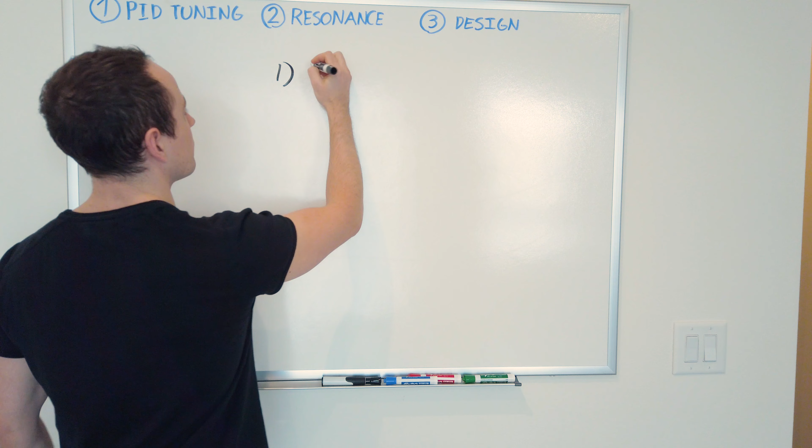First is hover at low PIDs. Now, in general, what I do is I use the sliders. Follow UAV Tech's slider tuning video—he PID tunes his drone in like 2 packs. That's the same process that I use.

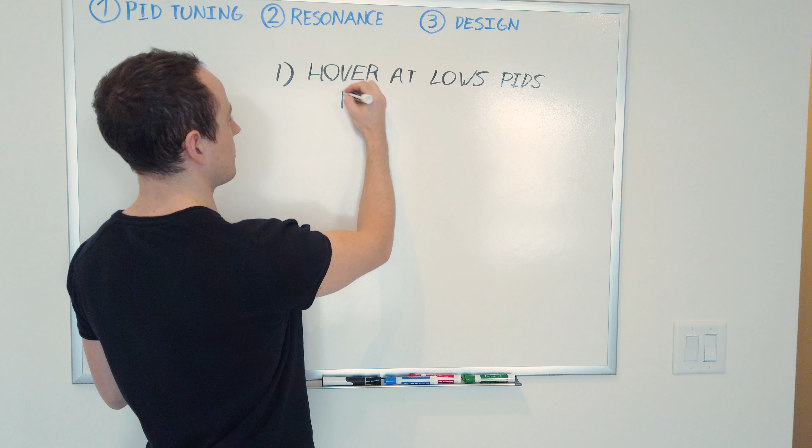But with a Cinelifter, you want to be careful. Set your P to D ratio to, I don't know, 1.8 is a good number, where you have a higher D term than you would normally to compensate for the extra momentum of the camera payload.

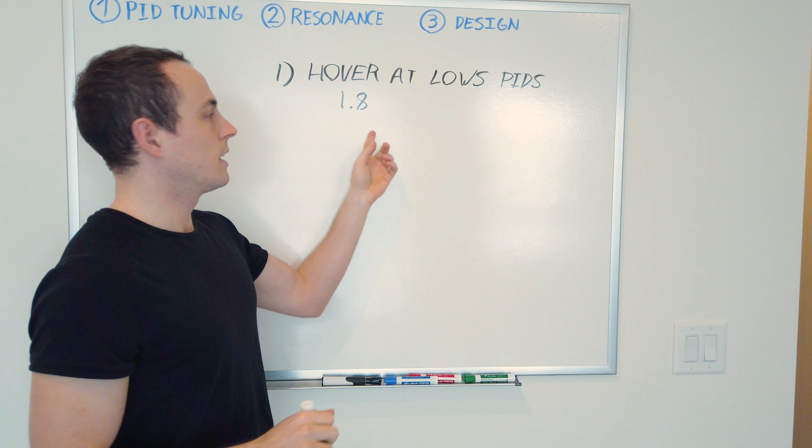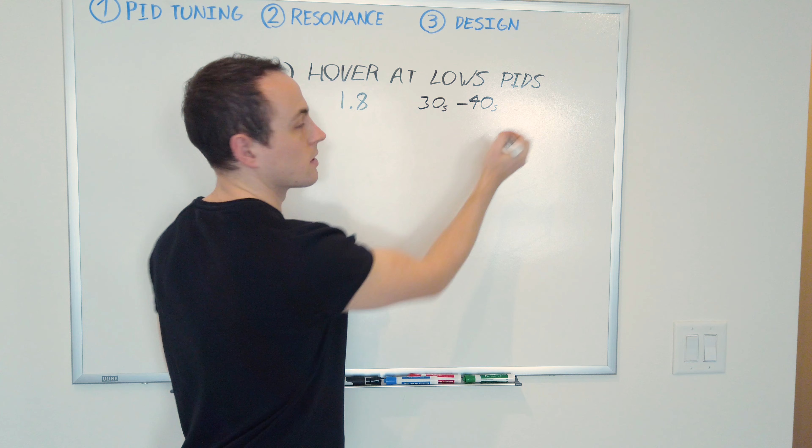Once you have that, turn down your PD gains such that they're in the 30s to 40s. This will first make sure your drone's propellers are turning in the right direction and all that stuff, so nothing crazy happens. But when your drone is lower in PIDs like this, if something crazy happens, like a flyaway, it's not going to have enough power or reactivity to actually take flight and shoot up into the air.

So that's a safety thing. The second reason why you want to start off your drone with the Ps around 30 or 40 is checking resonance. You should really learn how to use blackbox, and there's plenty of videos on how to do that. The power of blackbox is you can go in there and see things you can't normally sense. If you get really good, you can hear resonance and oscillation.

It will just sound more rough around the edges, but you won't be able to really quantify that. So after doing a hover test—first step, hover test at low PIDs—check the blackbox, search for any resonance spikes. Resonance spikes usually happen either in the frame itself or with the camera payload mounting system.

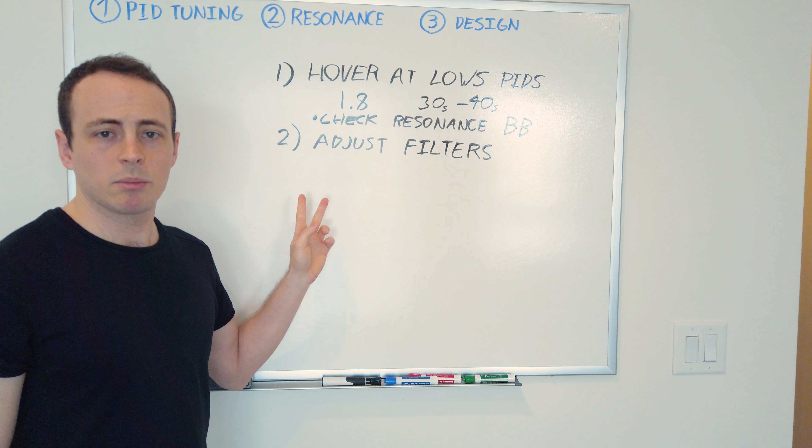Okay, second step is to adjust any filters you have. The way UAV Tech does his filters, I'm a fan of. What you do is you turn off the gyro low pass filters, and then you're utilizing the dynamic notch filter and the RPM filter to do all the filtering for your drone. What that does is reduce phase delay, and you want to reduce phase delay as much as possible. We'll talk about that more in the next chapter. But the important thing here is if you have resonance because of your camera or your frame, you want to apply a notch filter.

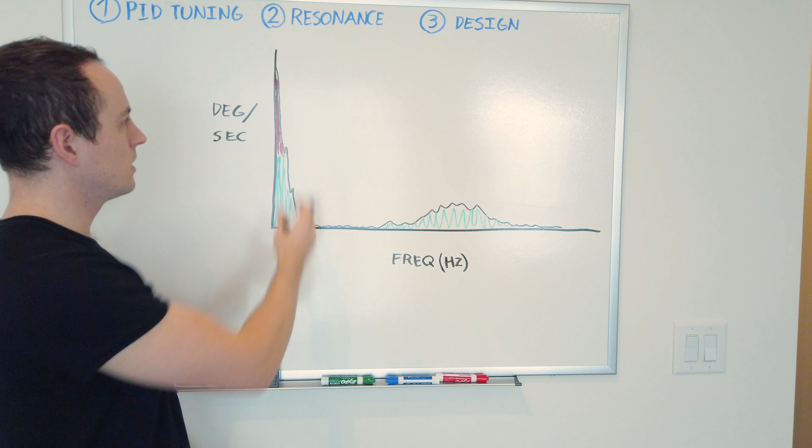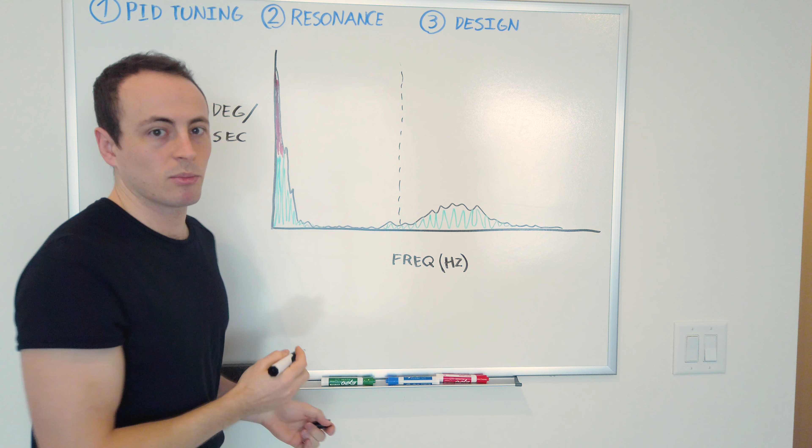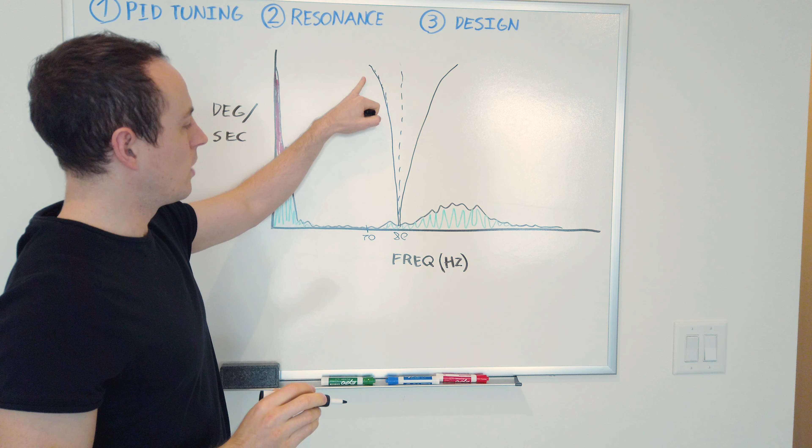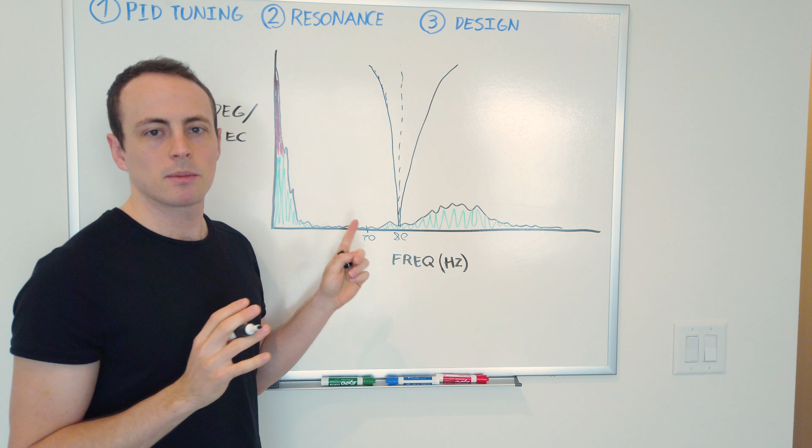Real quick, what a notch filter is: this is a spectrograph in the black box. What a notch filter does is you choose a center point. Let's say the center point for this one is 80 Hertz. Then you choose a center and a cutoff. Let's say your cutoff is 70. It's like a little spear that when it's closer to 80, the notch filter becomes more powerful, and it tells the flight controller to ignore that frequency range. That becomes very useful if you have resonance issues.

Okay, we're still on PID tuning. The third part is start pushing those PIDs. Once your drone is flying smoothly and you're getting no oscillations or resonance, then you can start bumping up those Ps. Now, I found from my experience, the sweet spot is around 60 or 70 for the P term, but obviously every tune is going to be different. Even if you have the same drone, even if you have different flight controllers with different gyros, you're going to have a different tune. And as far as PID tuning philosophy, it's a matter of what you value.

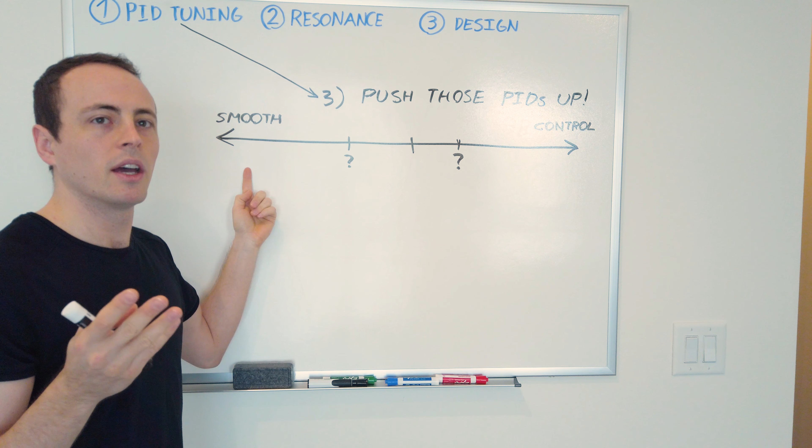So this is like a spectrum of what you could do with your PID tune. You could have something that puts more emphasis on smooth flight footage, so that's especially important with Cinelifters. Or you could put more emphasis on control. Now, little quiz: which of these correlate with your PID tune? Higher PIDs mean which of these, either smoother or more control? If you chose control, that's correct.

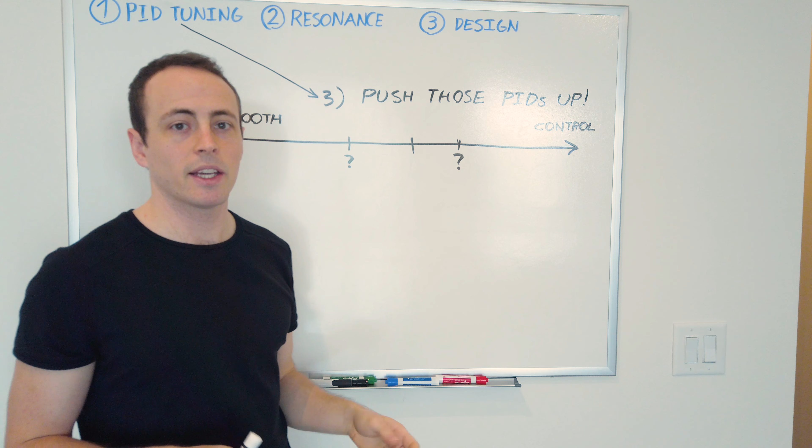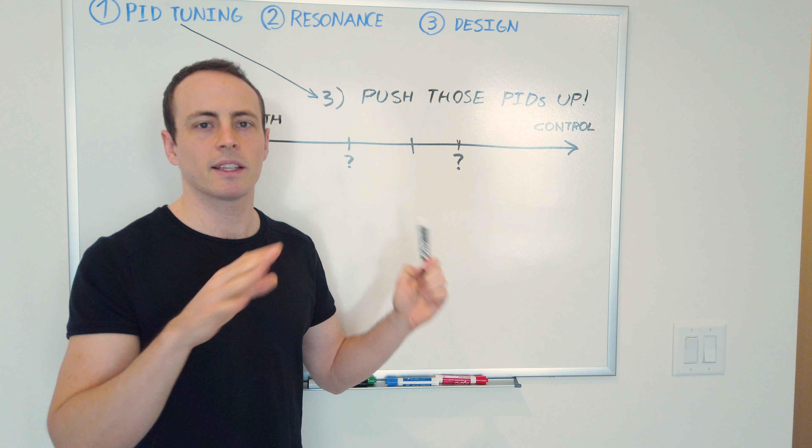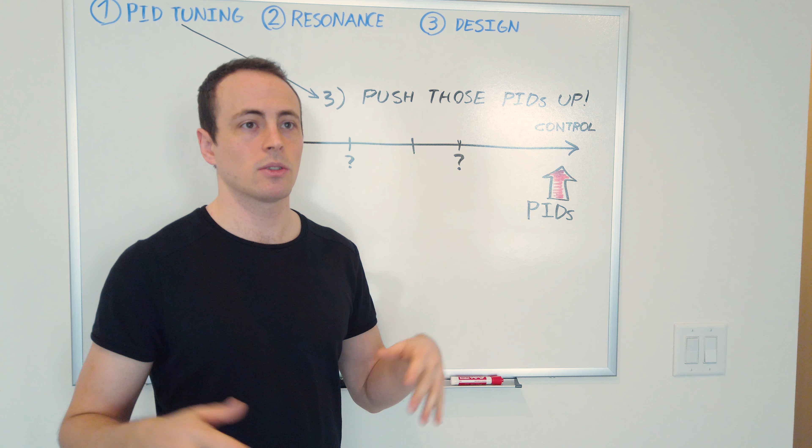When you increase your PIDs, that increases the power that's going into the motor so it can turn those propellers and react to external forces. The problem with that, though, is if your PIDs are too high, your motors become more reactive. The D term plays a large role in having overly reactive motors. They get hot, they make weird noises, and what's happening is there's feedback in the system, like resonance. So if your PIDs are really high, you're going to have good control over your craft, and this is something that FPV racers like, something that's responsive and feels locked in and agile. The problem with that is that as you increase your PIDs, your motors become more reactive to all sorts of things, to the wind, to resonance in the frame.

On the other end of the spectrum is valuing smoothness. If your PIDs are lower, your footage is going to be cleaner. So the motors aren't overly reactive, they're just doing mostly their job of maintaining thrust. But motors need to push the prop responsively enough so that it can maintain attitude. Attitude is the tilt of the craft. So if the PIDs are too low, then you're not going to feel totally in control. It's going to feel a bit loosey-goosey in the air.

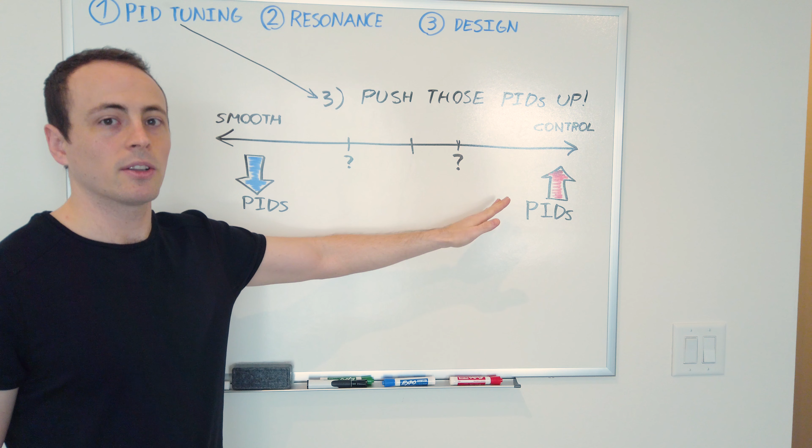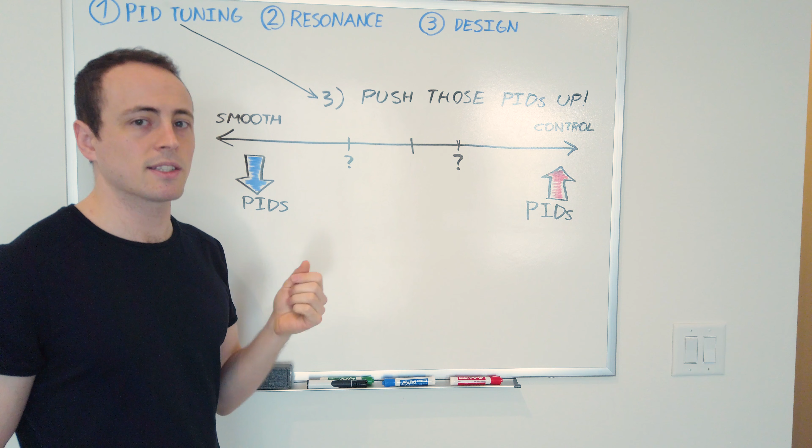And the goal with Cinelifters is to find that balance point, and that's really up to you. If you need pristine footage, you might have to do it at the cost of less agility and control of your craft, and get used to flying with something that's a little bit more loosey-goosey. That may be the case if you use something like SteadXP, which is very sensitive to any kind of vibration. But at the same time, you want to be able to control your craft, so pushing your PIDs up will make it feel a lot more locked in.

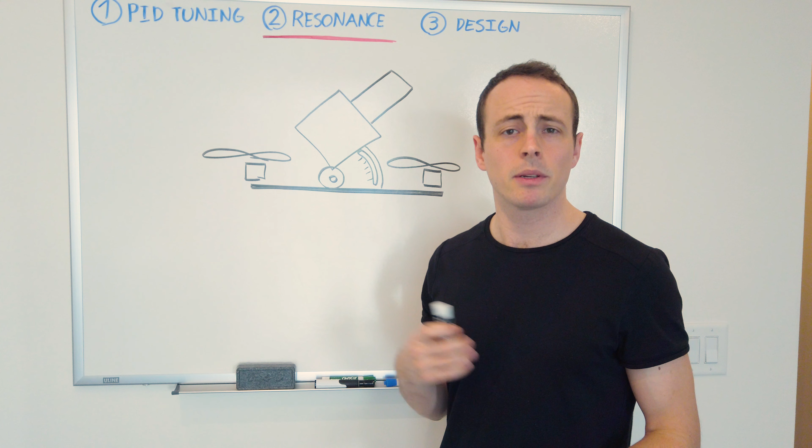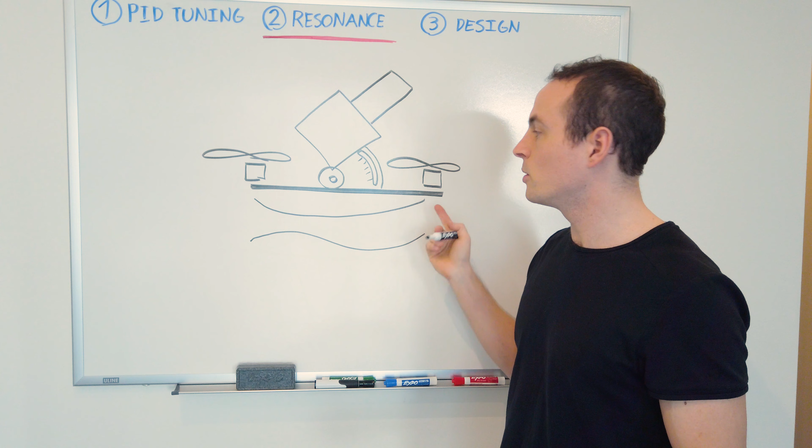Because these frames, they're not perfectly stiff, they can bend in like a U direction, or they can bend in like an S direction. These are called harmonics. As you go up a harmonic, they become higher and higher frequencies of resonance. Those are things you definitely need to consider.

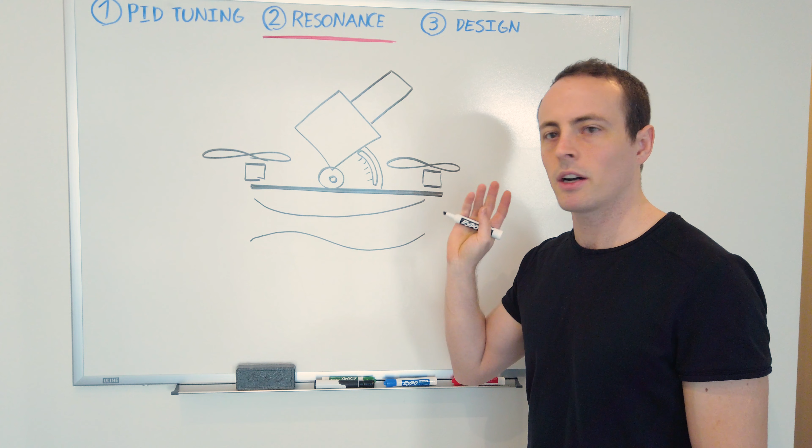But in the context of Cinelifters, there's an added factor, and that's this camera here. Oftentimes it's the lens that's the culprit. It can shake up and down. Even if you have a rigid mounting system, there's always a little bit of play, a little bit of springiness, and it will bounce up and down.

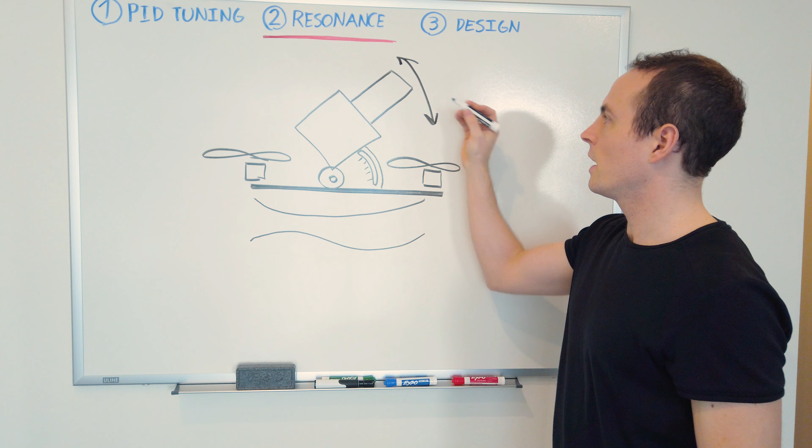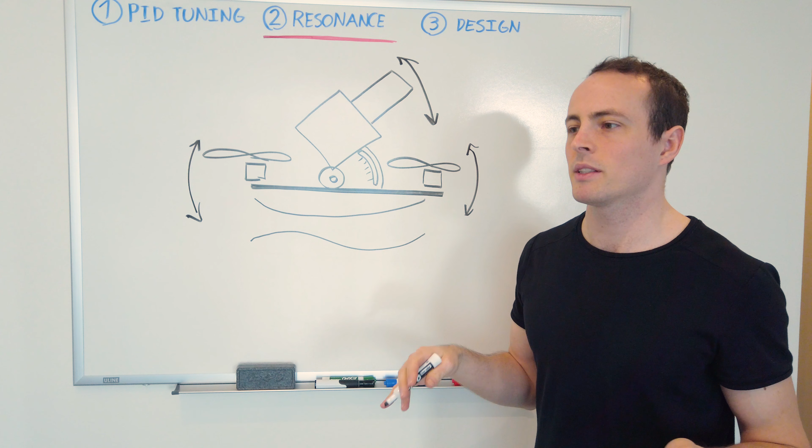And whatever that frequency is, it may cause issues because your drone has natural frequencies not just within the frame itself, but as a platform itself, because the motors are spinning, the props are creating thrust, and the whole drone has angular momentum. If you have big chunky motors and really wide arms, you're going to have higher rotational inertia, so it's harder for it to oscillate back and forth. That means the drone's resonance frequency is going to be lower, maybe like 30 hertz or something. But as your drone gets smaller in footprint and lighter, it can oscillate at higher frequencies.

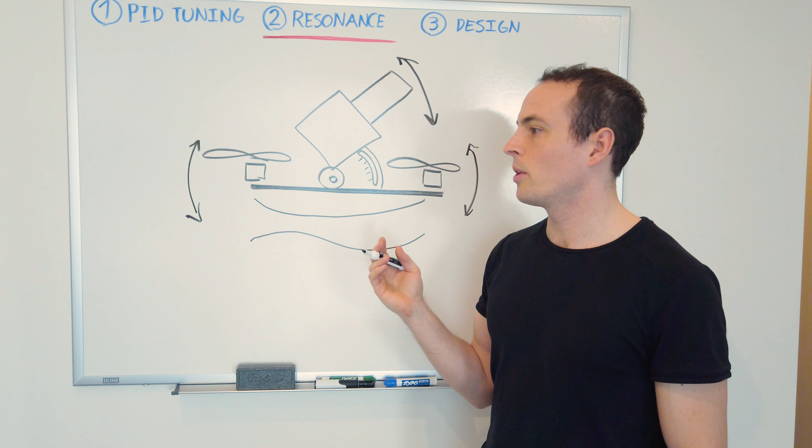But thrust also has to do with it too. If you have a ducted Cinewhoop, although it's small and compact with small motors, the thrust it produces is very large compared to the payload. So that influences the resonance of the drone platform as well.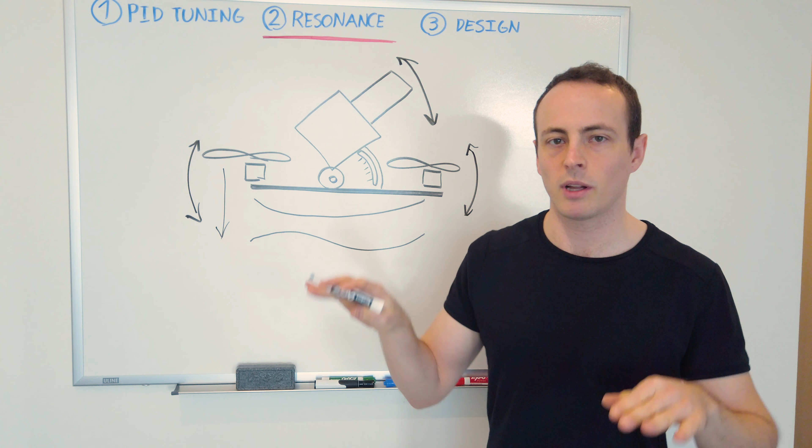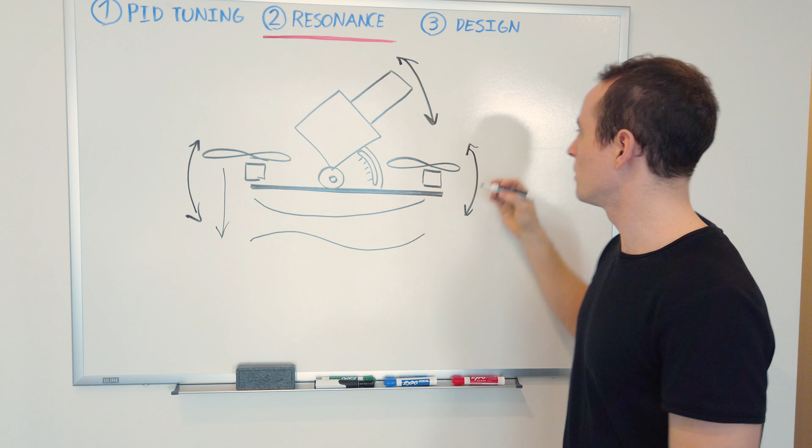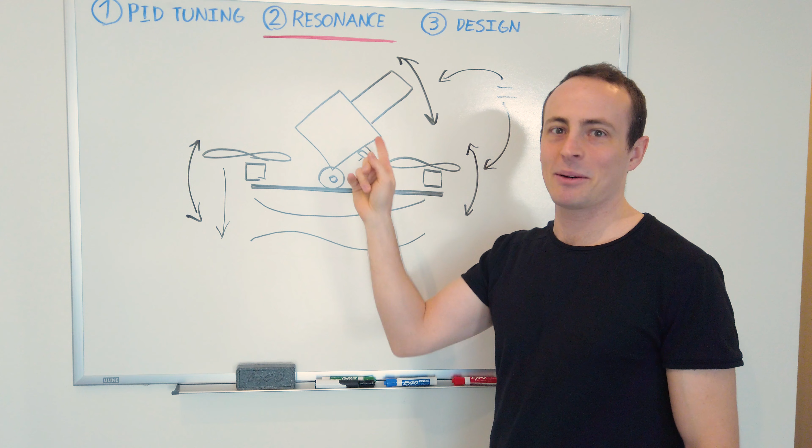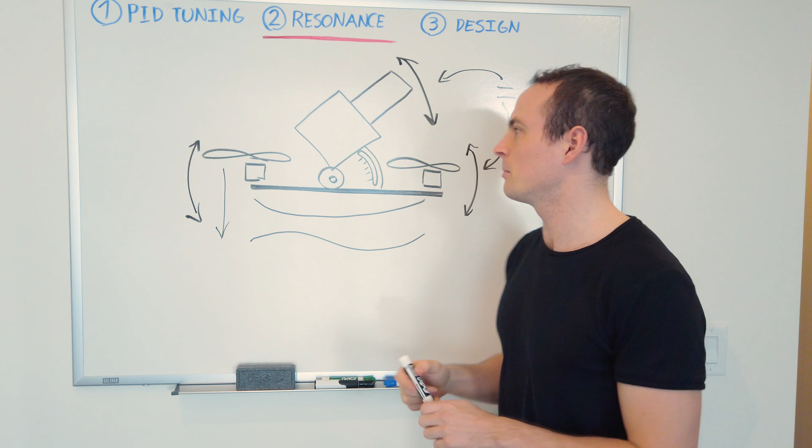The issue usually with Cinelifters is the first harmonic resonance of both the camera and the drone itself. Basically, when these two things equal each other, the rate at which the drone likes to do this, and the rate at which the camera likes to shake up and down—usually it's the roll axis that gives a lot of issues, but it really depends on your mounting system. So when the rate at which the camera likes to jiggle up and down and the drone likes to bobble match, you have a problem there.

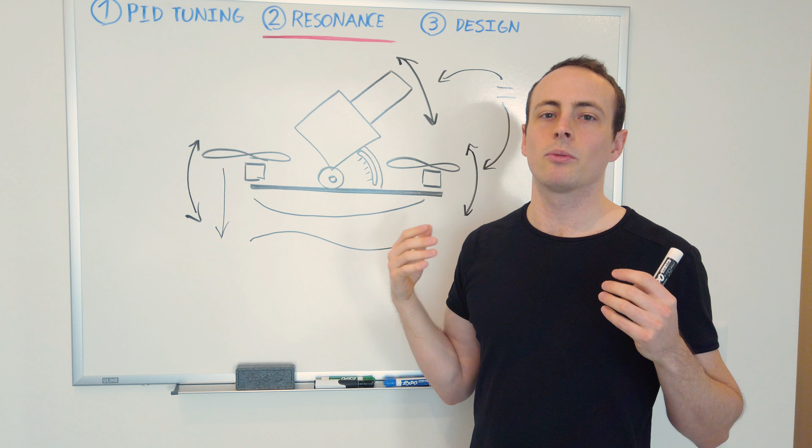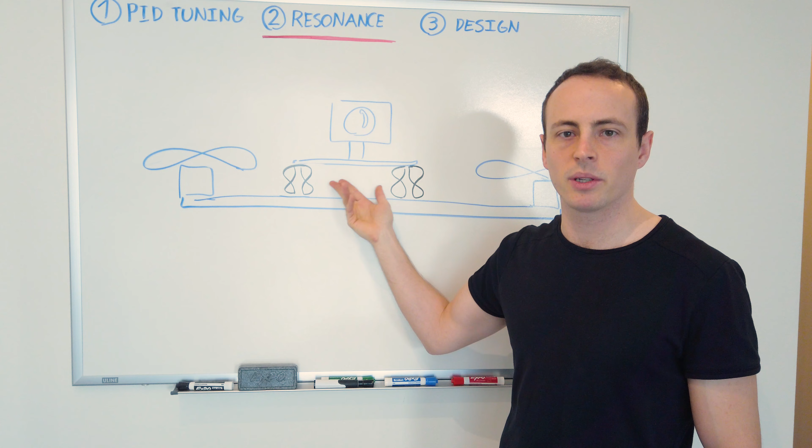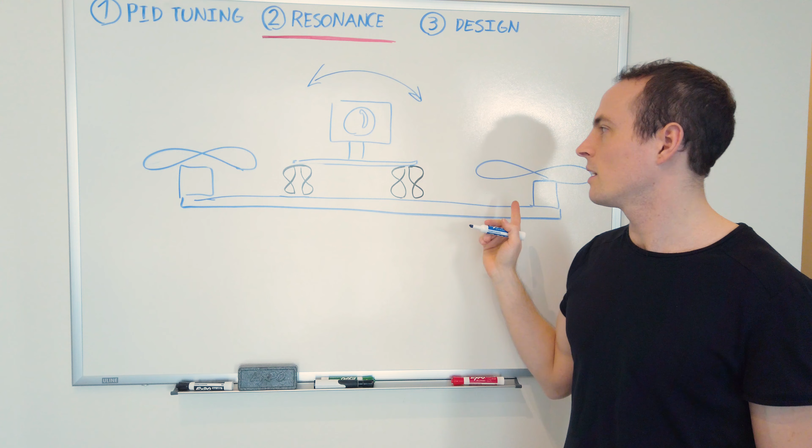That's called resonance, and you can get a flyaway if your mounting system is not very rigid. As an example, I had a drone with wire rope isolators, and they worked great, but the issue was the resonance frequency of this camera payload—the rate at which it rotated on the roll axis—was very similar to the frequency at which the drone liked to oscillate on the roll axis. I ended up getting 3 flyaways with this drone. I caught it twice, but the third time I didn't catch it and I broke my camera.

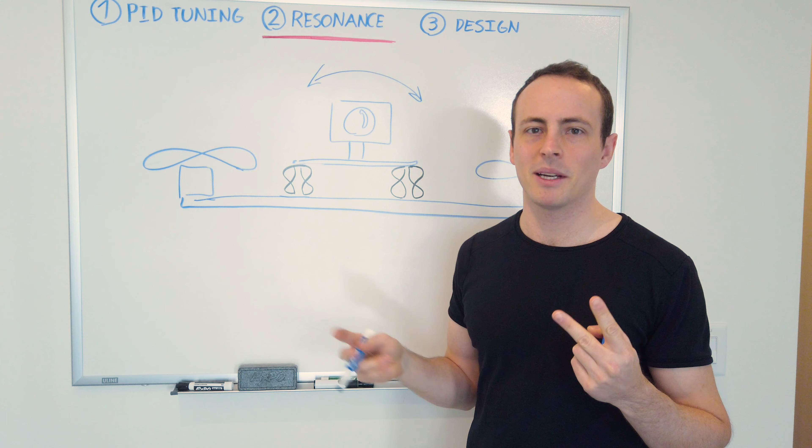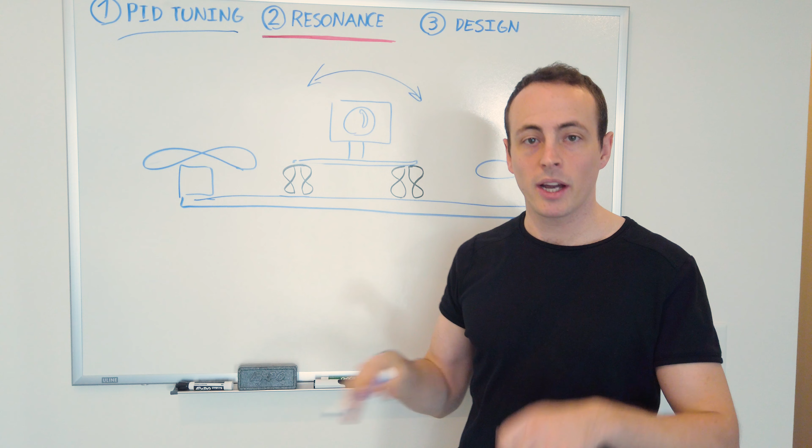So that's why it's important to follow the steps in the PID tuning guide and start off with low P values. If you do have resonance, you're not going to get a flyaway, and you're not going to have to run after your drone and catch it with your bare hands.

After disarming, of course. Next is the filters you need to consider in order to mitigate resonance. As UAV Tech has shown very effectively, turning off your gyro low pass filters and letting the dynamic filter and the RPM filter do the filtering for your drone is good for Cinelifters.

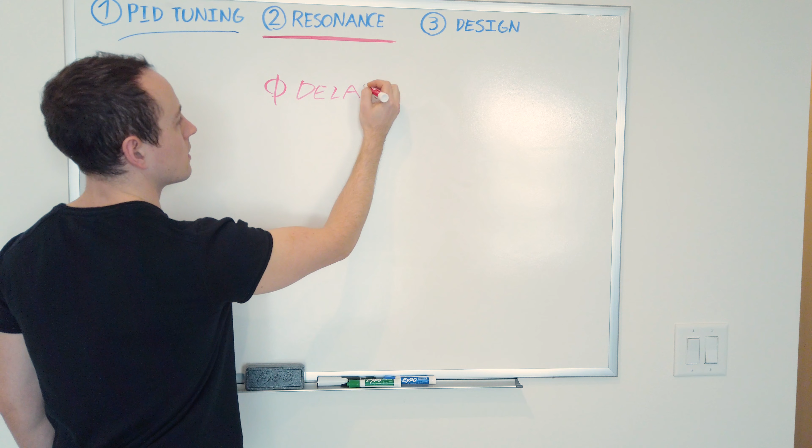The reason why is because it reduces phase delay. Phase delay, the way it's linked to resonance, is as you increase phase delay in your PID loop of your drone, you increase the reactivity.

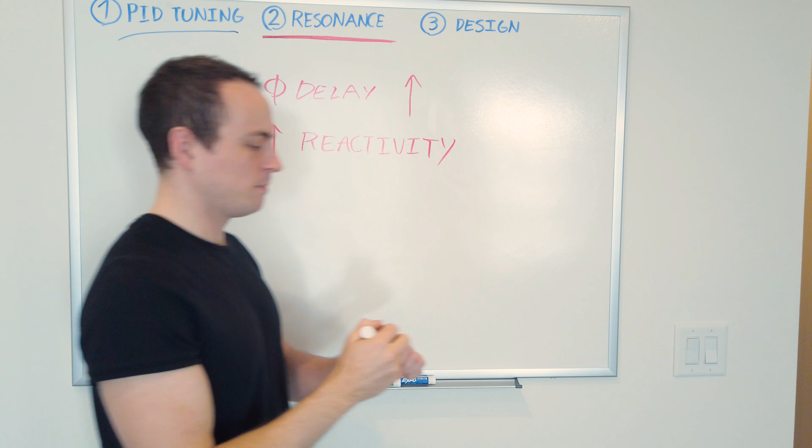So what is phase delay? It's the responsiveness of the flight controller—how little time it takes to respond to external forces acting on the flight controller trying to change its angular attitude. Reactivity, what I'm calling it, is the chances of a drone having resonance of any kind. As you increase the phase delay, the drone is going to take more time to react. It's going to be less responsive to external forces.

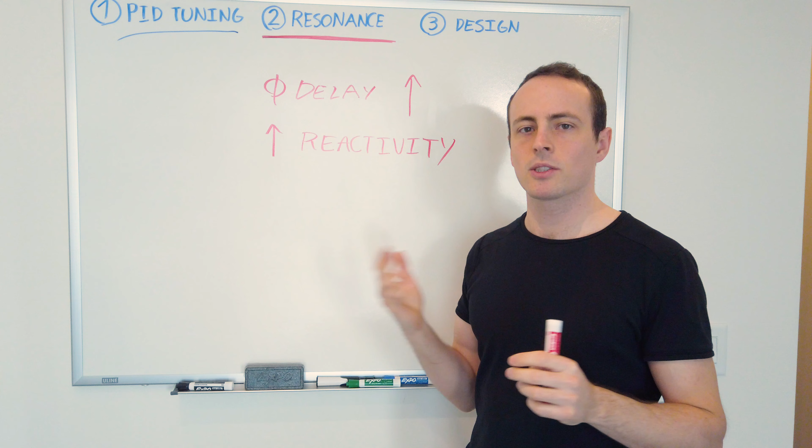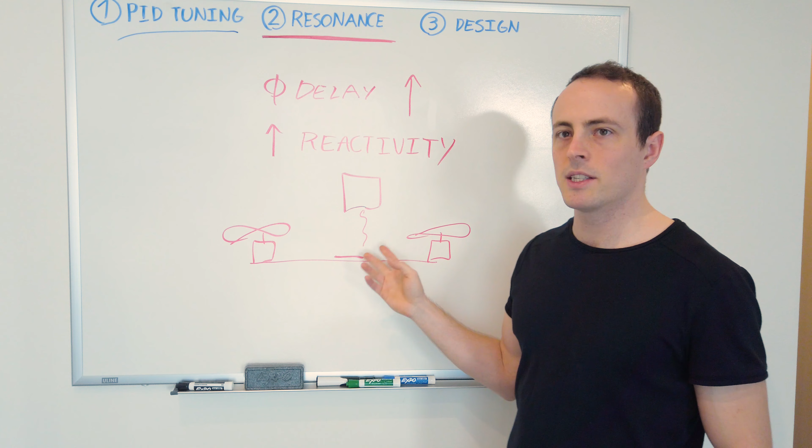So with a payload like this, it's acting like an external force on your flight controller, which is usually mounted in the center of your drone here. And if it has a lot of phase delay, when this payload starts swinging back and forth—not really swinging, just vibrating—the flight controller is going to react, but it's not going to react in time. It's like someone trying to stop a child that's swinging.

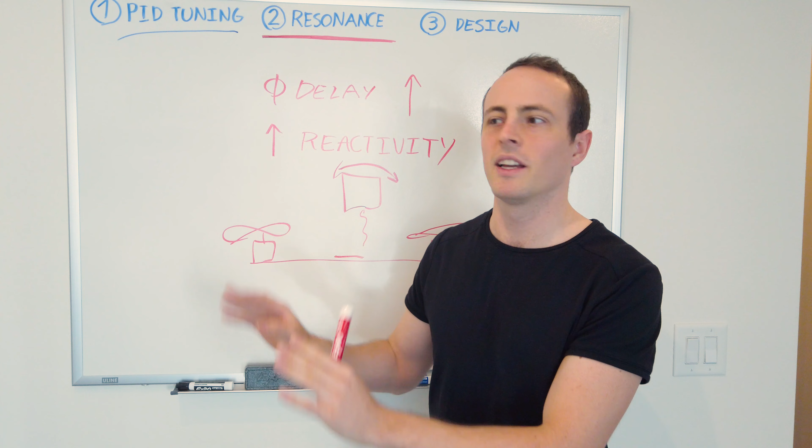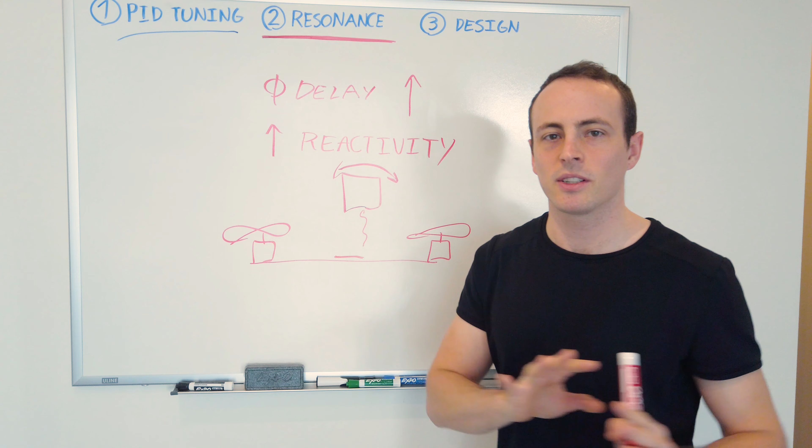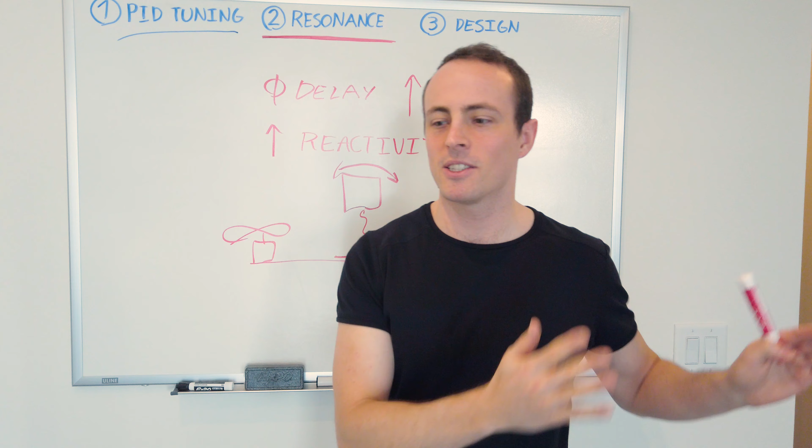If you are not responsive enough and you don't press against the child as they're coming toward you at the right time, then you might actually be too late, and by the time the child is swinging back, you'll hit the child, you'll push the child, and they'll swing even more, and it gets into this runaway feedback loop.

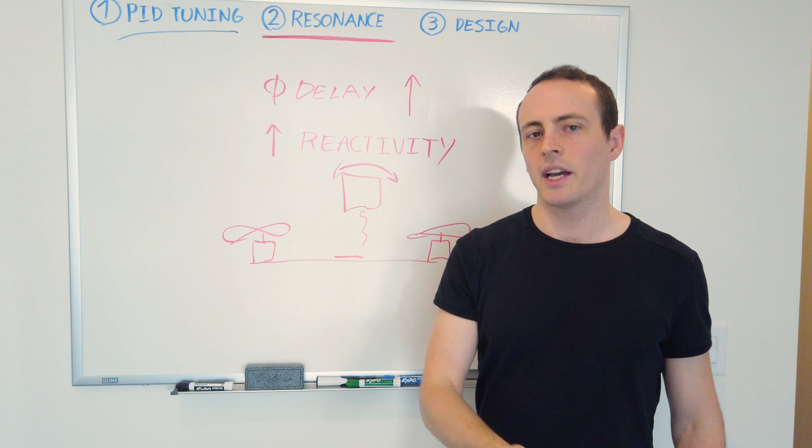So you want to reduce phase delay as much as possible, and that means tailoring your filters as such. Lose that low pass gyro filter, use RPM and dynamic filtering if you're using Betaflight, of course. And then I usually keep the D-term filters, like the slider, to medium.

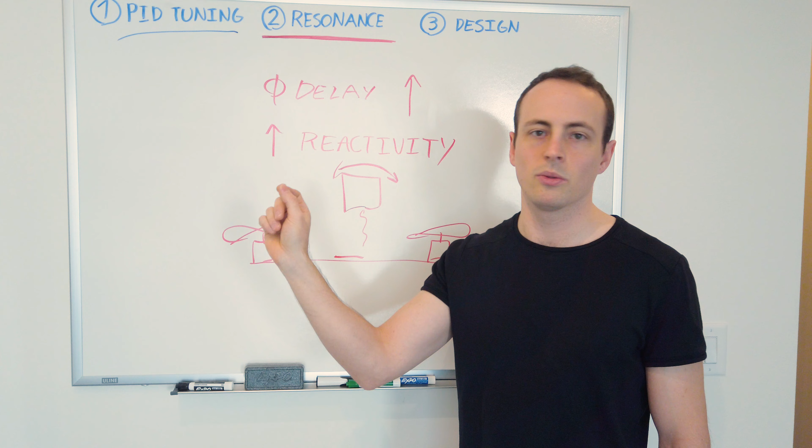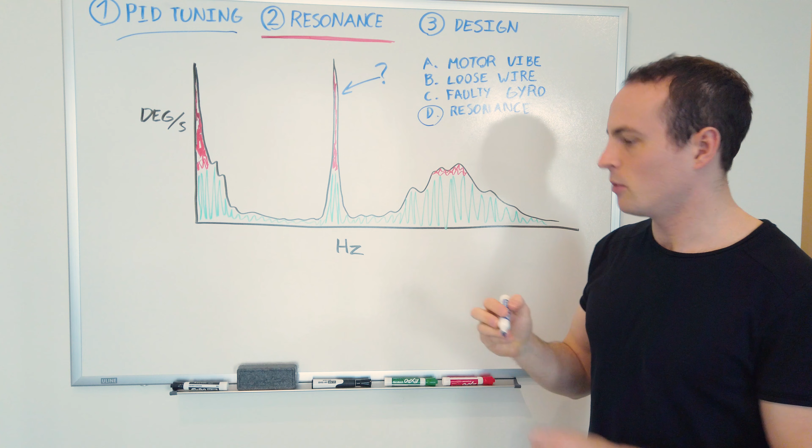Which of these? So pause the video, think about it, take your guesses. The answer is D. When you see something like this, especially in the frequency range of 30 to 80 hertz, around that range, that usually means that's camera payload resonance. So how do you deal with that?

There are two main things you can do. One is make sure your filters are sorted out. Try taking off the gyro low pass filter and utilizing others like the dynamic notch filter, RPM filter, all that stuff in order to reduce the phase delay. The less phase delay, the more chance it's going to be able to react in time to whatever's going on with the camera payload and not freak out and cause the spike like this.

Another thing is you can lower your PIDs. The lower your PIDs are, the less reactive the drone is going to be to outside forces, including camera payload resonance. Now you have to strike a balance.

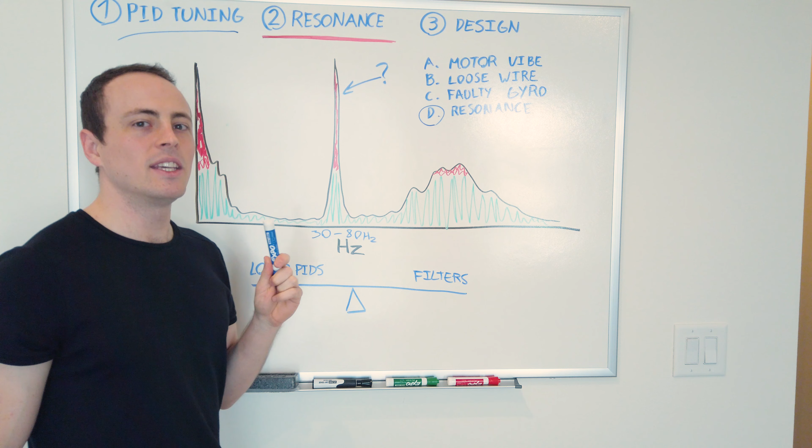The big thing here with filters is the notch filter. So with a notch filter, you can just kill this thing and your drone will fly smoothly and you're done. The issue though is it depends on the situation.

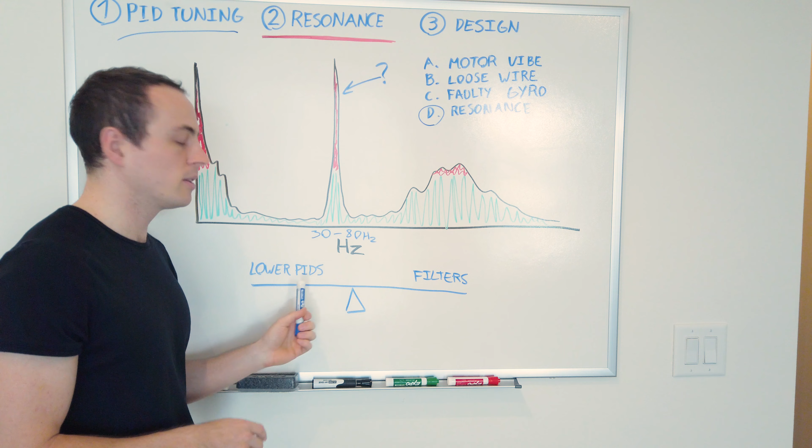What if your PIDs are already very, very high? What you can do is instead of throwing a notch filter on there, you can lower your PIDs and maybe this spike here will turn into a little hump. And if it's a hump like that, it's not going to affect your footage. You're not going to notice any difference in flight performance.

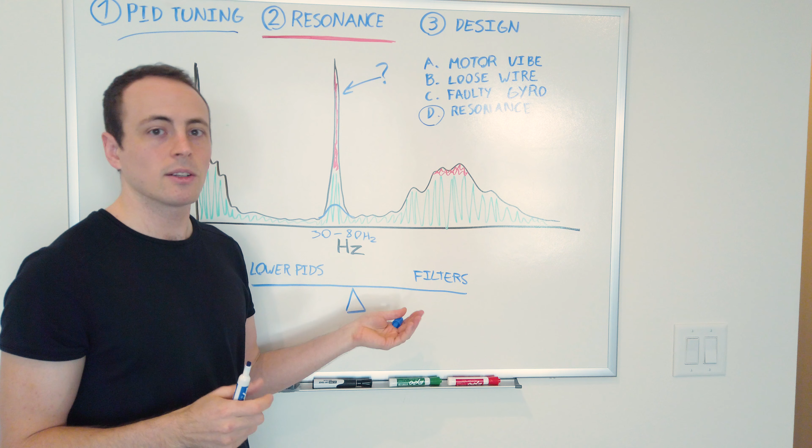But if your PIDs are so low in order to get to this point that you feel like the drone is kind of loosey-goosey and slightly out of your control, then you might want to consider throwing on a notch filter. Now, the notch filter isn't the greatest solution because it does increase phase delay in the PID loop system. So that means the drone isn't going to have as good prop wash handling, and it might have more chances of getting resonances at other frequencies, perhaps if there are other frame resonances.

The way the notch filter works is you set your center at your cutoff, your center notch filter right at the peak of the spike, and then you want your cutoff to be a little bit of a factor of safety to the left of the spike. You can find those points using the spectrograph in black box. And so it starts here and it increases until it gets to the center point, and then it mirrors that curve once again on the other side.

And after you apply the notch filter, you'll notice the next time you fly, this spike just completely goes away. And it's a little counterintuitive because, like, right here we have motor noise. This never goes away. There's nothing you can do about it unless you switch your motors, or get smoother bearings. You can reduce it a little bit, but it's always going to be there. It doesn't just magically go away.

But with resonance, it does magically go away. And the reason why is because as soon as you put that notch filter on, you're telling the flight controller, okay, ignore this frequency of vibration. Because the fact that the flight controller was not ignoring it before means that it was overreacting in this feedback loop that was causing the spike in the first place. So because you applied a notch filter, that vibration, that oscillation goes away completely. So it works like magic.

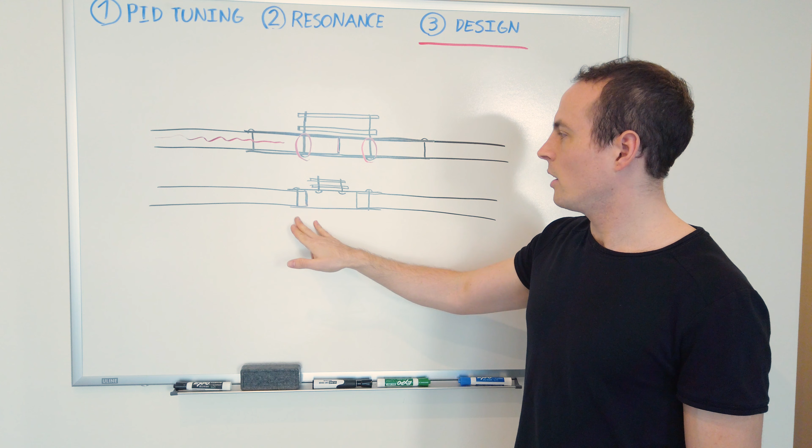When vibrations are higher frequency, it's easier to filter them out because they're further to the right on that spectrograph on the black box. As you apply low pass filters or whatever kind of filter, those are easier to attenuate. With the style where you mount your flight controller on a separate sandwich plate with arms spread out, the reason I don't do that is because of what I'll call drumming—like how a drum has a cylinder and a thin membrane that produces noise because the membrane oscillates up and down. Drones can do that too: this sandwich plate can vibrate up and down like a little speaker. Although it's the same amount of vibration coming in from the motors, the same setup, the reason this can drum is because of resonance. This carbon fiber plate has its own resonance frequencies, and there's more chance for resonance of higher amplitude to occur—that high amplitude, low frequency resonance becomes an issue, as we talked about with camera payload oscillations. So although the vibration source is the same, I think this design will fare better—although there's the same amount of vibration, it won't resonate.

With this flight controller setup, there's more chance that it will resonate. You might get lucky and have a flight controller mounted in this configuration with no problems, because your motor setup and geometry line up so it doesn't get excited by vibrations. But you may get unlucky and your flight controller area will resonate depending on what motors and props you're using. So putting the flight controller screws through the stack makes it as rigid as possible, so the vibrations coming in are as high frequency as possible, with less chance of resonance.

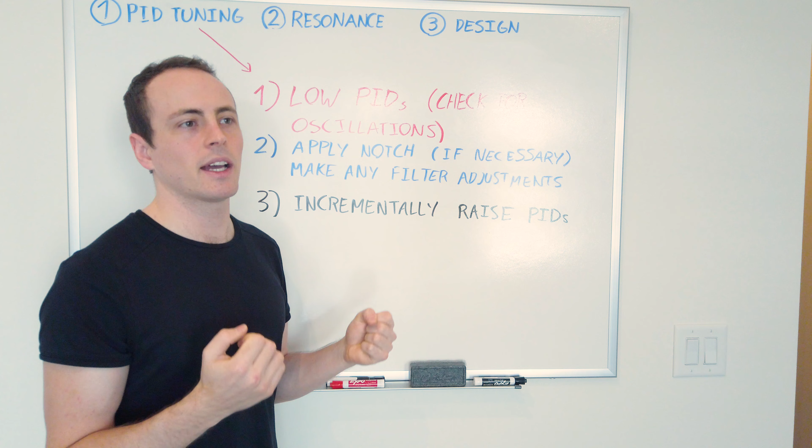Step 2 is, if you do have a notch filter, apply it, add a little factor of safety to account for any differences in lenses you'll be using, and then make any filter adjustments. A lot of Cinelifter frames have very stout arms, so oftentimes you don't need the gyro low pass filter, but that's not every frame — it might even depend on who builds the frame. You may have a frame sensitive enough to necessitate a gyro low pass filter, and you just use the filter slider and slide it whichever way you need to so you're not getting weird noises.

Definitely use black box all throughout this process. So for the third step, incrementally raising your PIDs, what I do is a hover test.

Let's say I have resonance. I apply a notch filter, do another hover test — no resonance, flies smooth, but it's a little loosey-goosey. So I start raising the PIDs incrementally, usually 1 or 2 steps on the slider at a time in Betaflight, then check the black box again. I do a hover test, check the black box, make sure that resonance spike hasn't spilled out the side of your notch filter, because that can happen if your notch filter isn't wide enough. So make sure that's not happening — you can also tell just by hearing, like it doesn't sound as smooth.

Every time you raise your PIDs, do a hover test, make sure there's no oscillation. Once you get your PIDs up to like 50, 60, 70 — I prefer around the medium 60s — and you feel like you're in control, do a bit of those jerk movements like UAV Tech or Stinger Swarm recommends for PID tuning. Basically it's that step input process. As soon as you do that and feel in control, you can throw the goggles on and start flying.